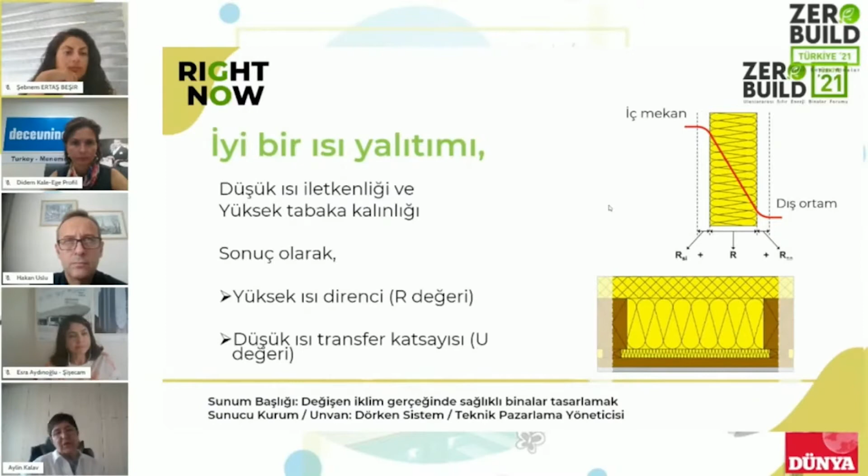We can continue with the presentation. As the most important layer, there needs to be high heat resistance, and also low heat transfer. We have to increase the thicknesses; regulations should be adopted accordingly. What we know from the system is the importance of high heat resistance and low heat transfer coefficient. So we should not look only at the materials - we have to look at the columns, the junctions, and other materials, and the empty air spaces should be taken into account.

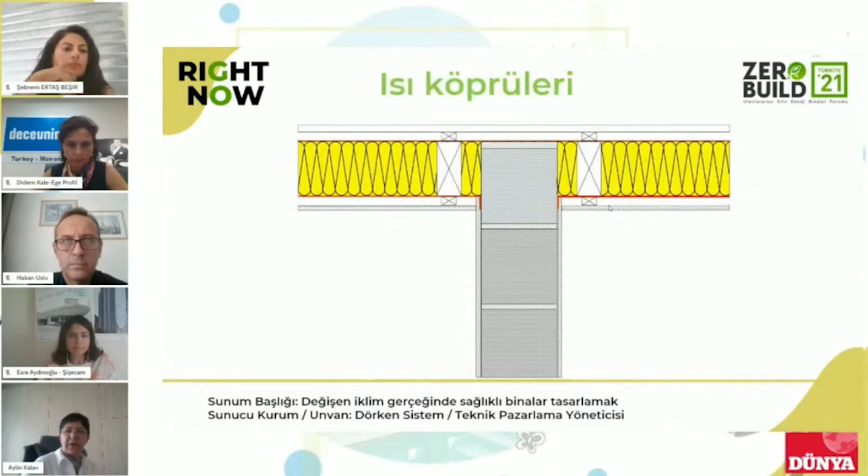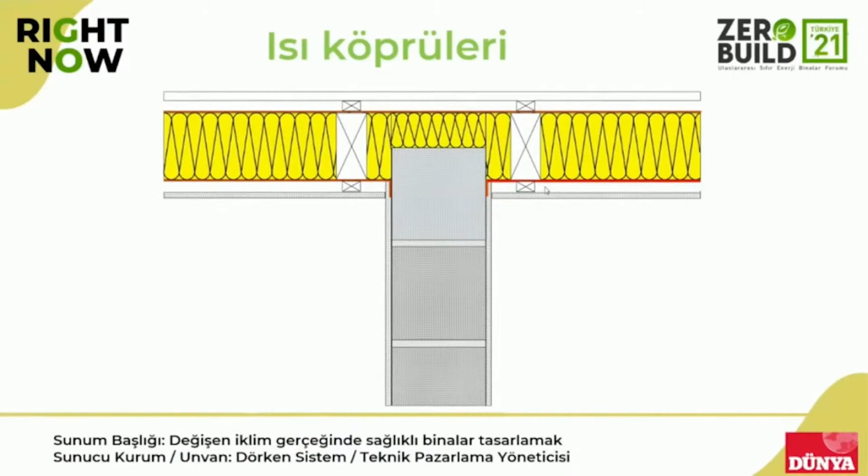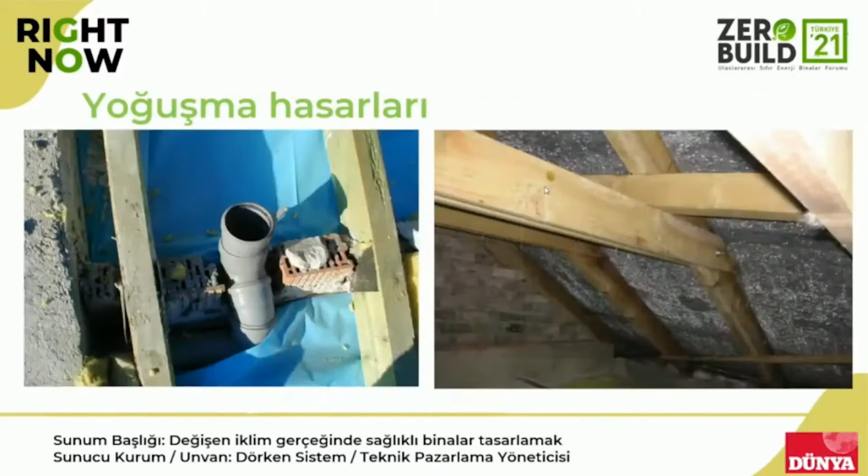I'd like to give you some information about condensation. In a few slides, I'll look at this. Of course, there are some weak points. We see what is there, so we can see. Let's continue.

Therefore, there are three important things: vapor diffusion, air tightness, and wind tightness. At this point, when we take all the necessary measures, we can talk about the good climate there, and of course, it's about a zero energy structure.

Within this system, the most important thing is the diffusion. It is about the carrying of the water evaporation without air movement, and there are differences there. At this stage, it's about the related SD value, and I will tell you what SD value is in the upcoming slides.

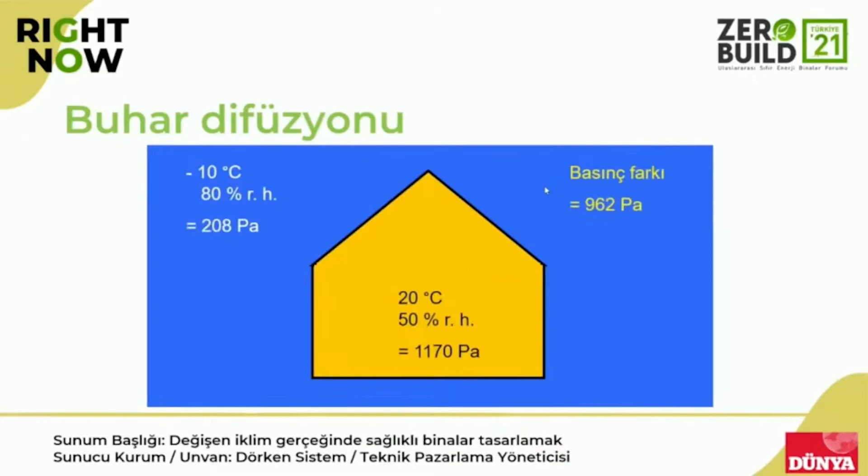So the problem is that, let's continue. The most important problem is about this, and if the relative humidity is 50%, we can say that there is 962 Pascal as a difference.

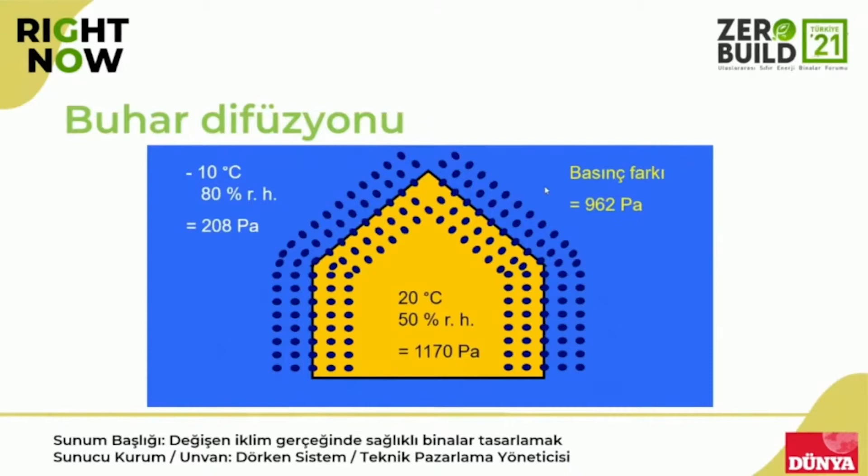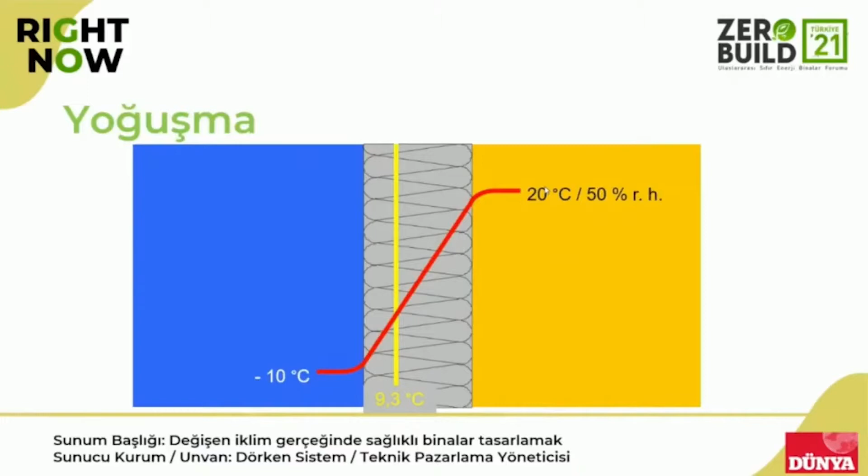Let's continue. During that stage, the heat insulation, as the insulation will be colder, we will see the evaporation will be there and the condensation take place. As you see here, the insulation is with air tightness and tight insulation. So condensation will be within the heat structure.

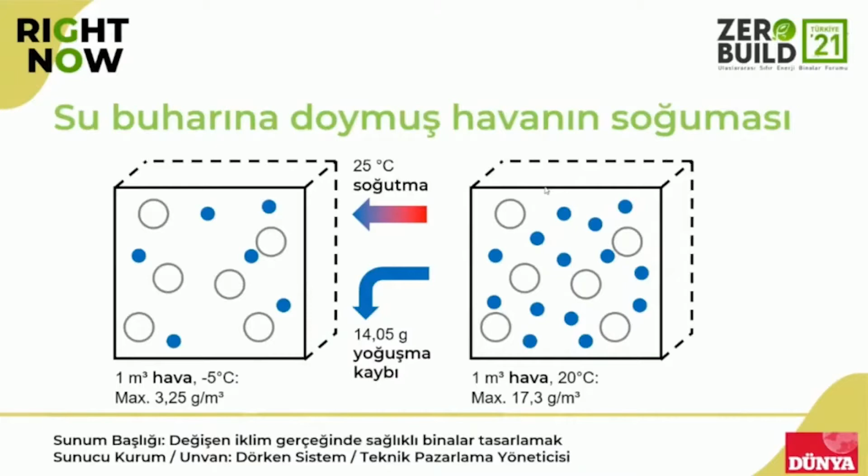In one cubic meter, with a certain 25 degrees centigrade of cooling, it will be more than 14 grams. People generally say that when the roof is leaking, they think the only problem is about this. It's about the systems as well, because the condensation water can harm the structure, and there will be fungi and other formations there.

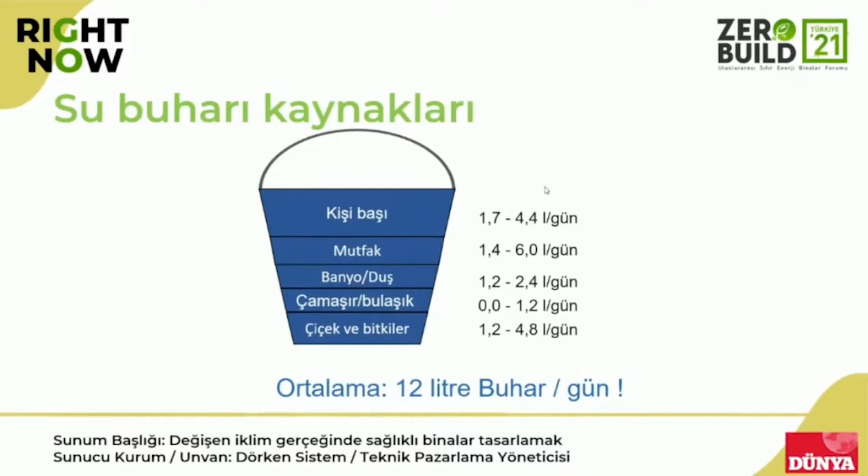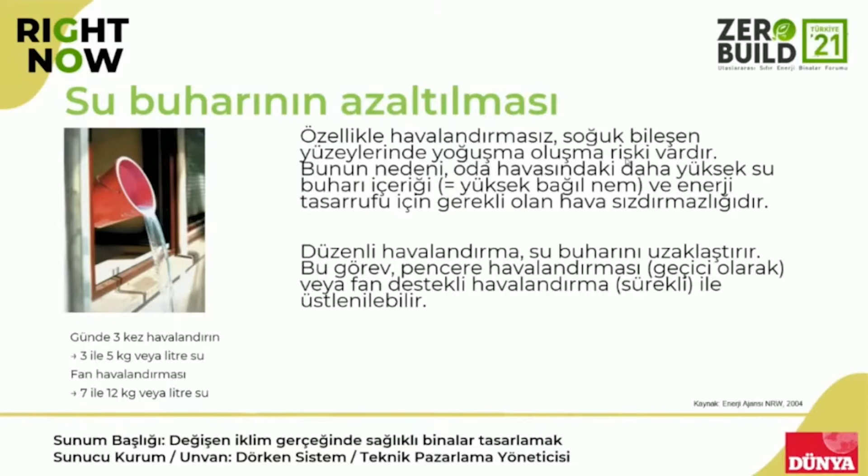In residential areas, there is 12 liters of evaporation formation. When you have this, there is a certain evacuation of the water, and this can go up. So when you look at this, it is very important considering the water evaporation. When you make it airtight, you have to plan the ventilation there.

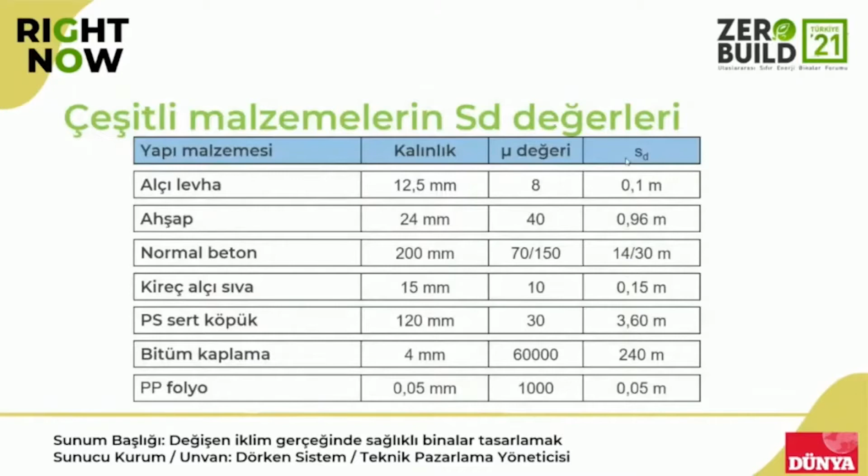The important thing is the SD value of the materials. When we say these, as we can see, it is about the water evaporation diffusion equivalent of air layer thickness.

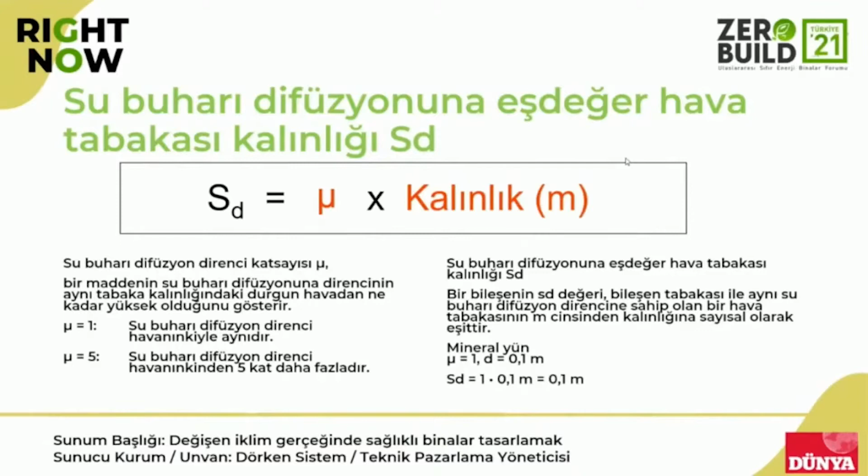So if there's a mineral wool, its μ value is 1. When you get the thickness as 10, and you multiply this in meters, we say 10 centimeters of this. So this is quite important. Let's continue.

This is indeed important because until 2018, the SD value was that up to 0.5 meters is an evaporation layer, and between 0.5 to 1,500 is an evaporation control layer, and if it is above 1,500, it is the evaporation cutting system. In 2018, these were changed, as you can see in the graph. We are talking about 100 and 1,500 meters.

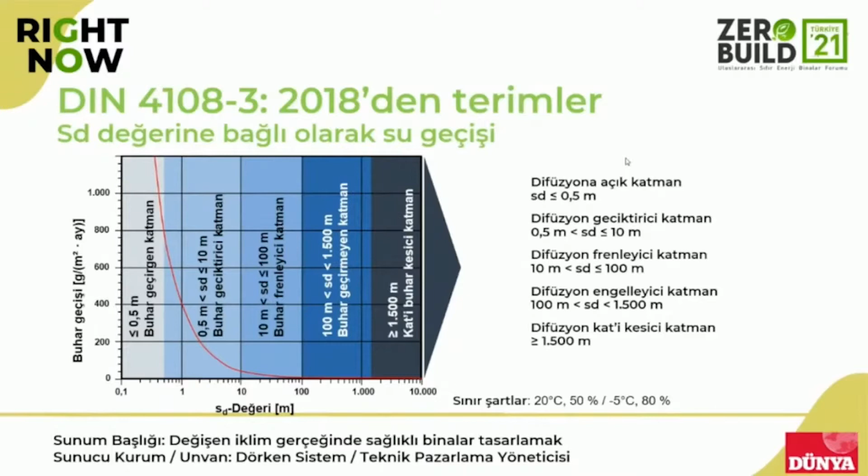Of course, it's on a unit weight in the market, but the most important thing is that the SD values, I mean the diffusion resistances, are the most important thing here.

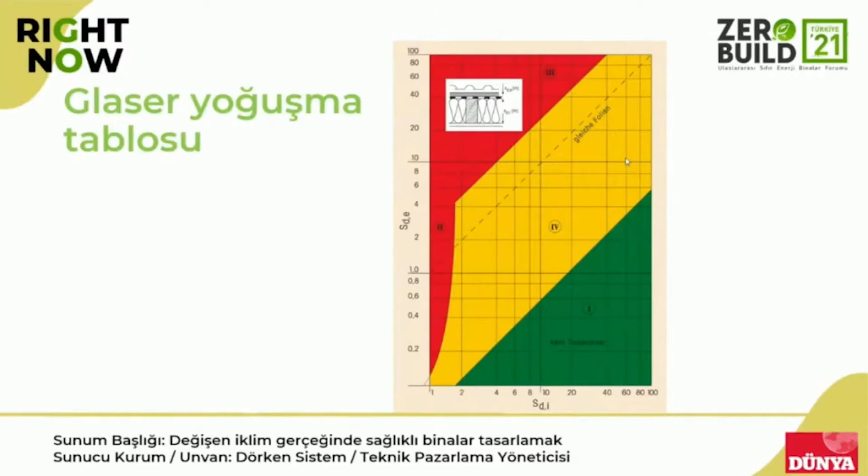Let's continue. This is very detailed. For example, there's a Glaser condensation table. I advise you that. So in the calculation, this condensation is very important. You see where you are, with a good system or not, with good values or not. Let's continue.

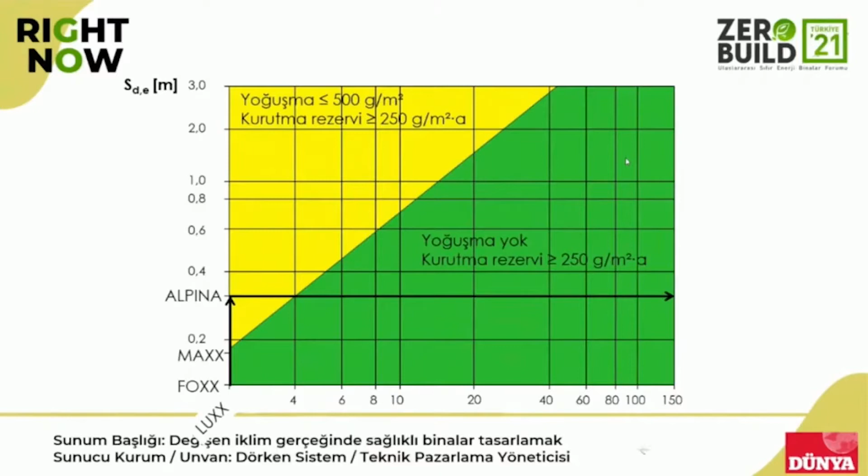Of course, in our products, we are talking about air permeable layers, and as we produce all of these, we have the simulations regarding them. We make all the simulations, and with that, we can make a suggestion.

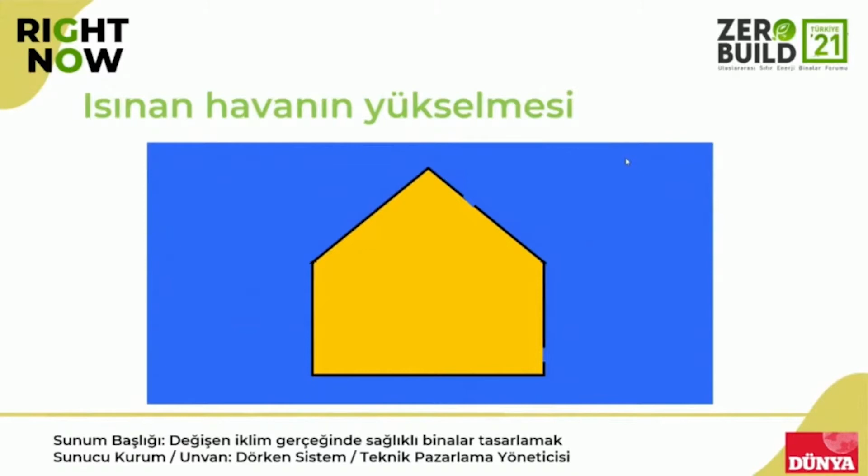Air impermeability is related to material, and also it's about the hot part of the building. There are many losses through air. This is about the suture or joint points of this, and there is the air getting high, and instead of this there will be cold air, and this is important there.

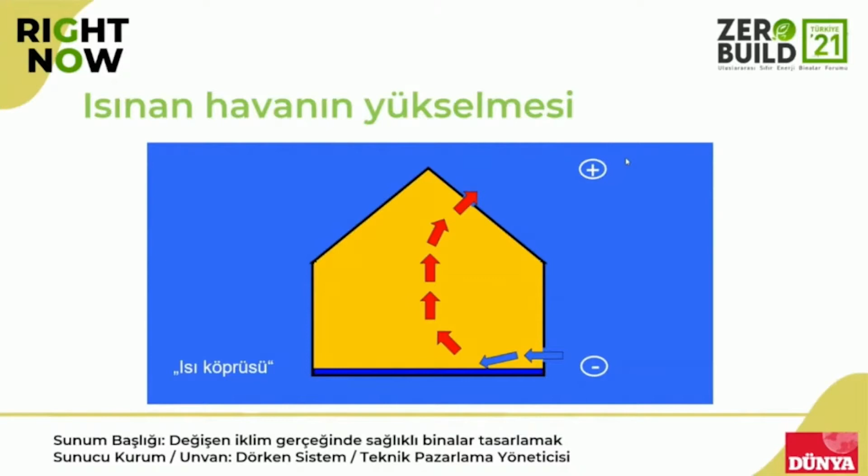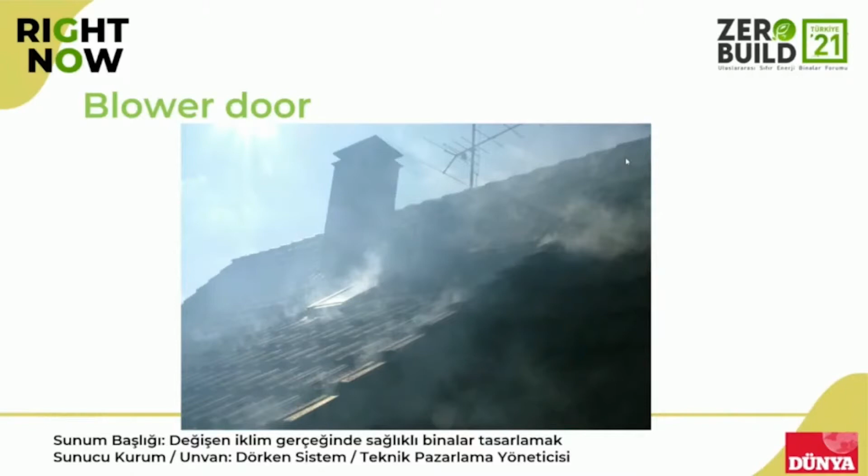In Zero Builds, the previous sessions already discussed this, so I will skip it. But it's about where the building loses energy. You can test them, with vapor barriers, evaporation barriers, and air barriers. It is only one material, but there are different constructions and structures, and based on different needs, there are different SD values.

Let's continue, skip this part. When we say wind impermeability, the layer changes, and what we need is an evaporation-permeable material. For this layer, it's always in the cold part of the building.

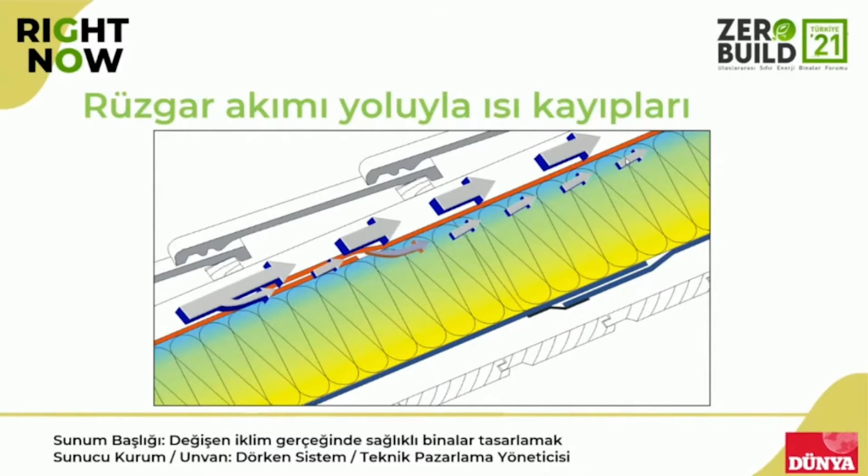You can go a bit faster. We should have been faster, but of course it is about the airtight layer being cold, causing condensation between the internal wall and the outer insulation. The most important thing is that from a very small joint, when there is air there, you lose 90% of the performance.

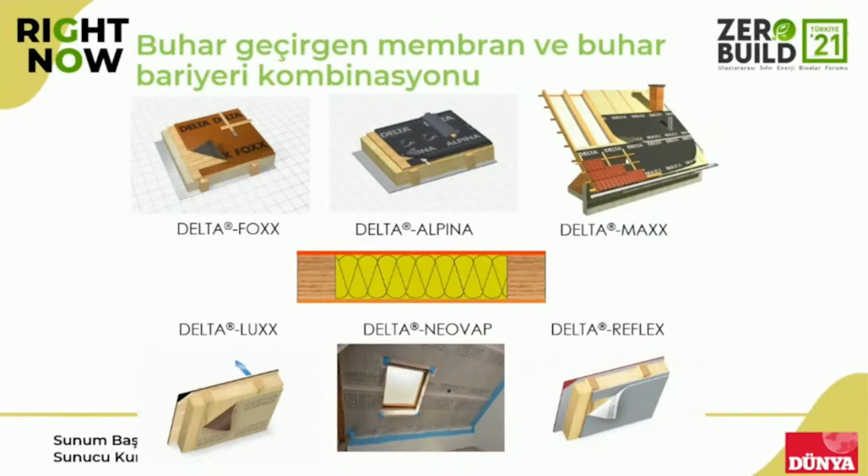There are membranes, the evaporation permeable ones, and the barriers are important, and we provide them.

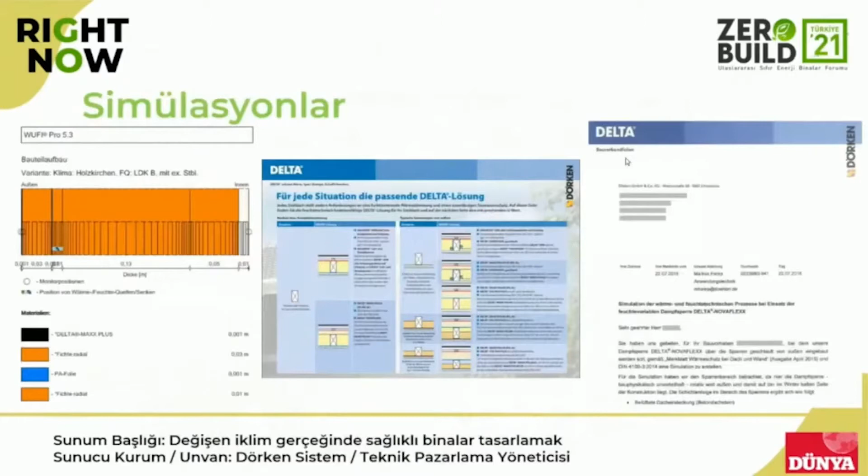I told you we are making simulations, and we provide services and consultancy for our own services. Let's go quicker - as you can see, there are dry wall systems, and mechanical facades and integrated facades can give different information, and we can look at this.

Let's continue. Of course, these are important about the form of the structure, and the implementation is very important here. We can look, we say it's important in terms of distribution.

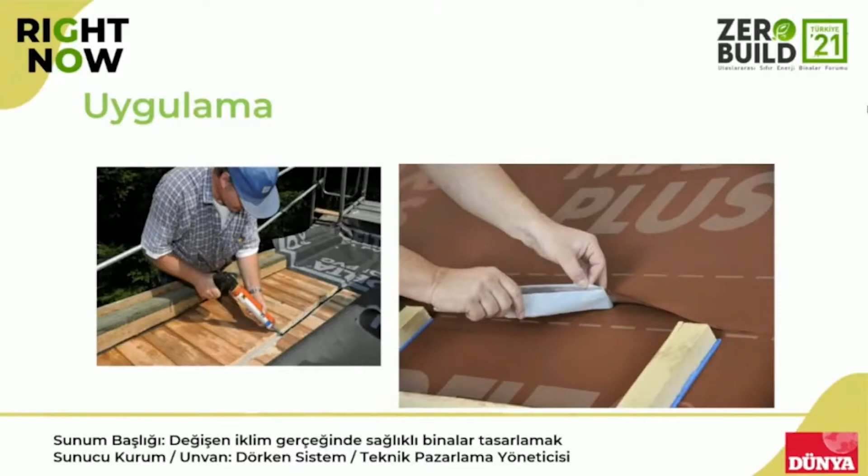Can you please wrap up? This is a very nice presentation, but the implementation matters, and there need to be the right permeability materials. Can we go quickly? What is needed here is this system and the cartridge systems for the layers - it will be appropriate for the material, and you have to select the materials.

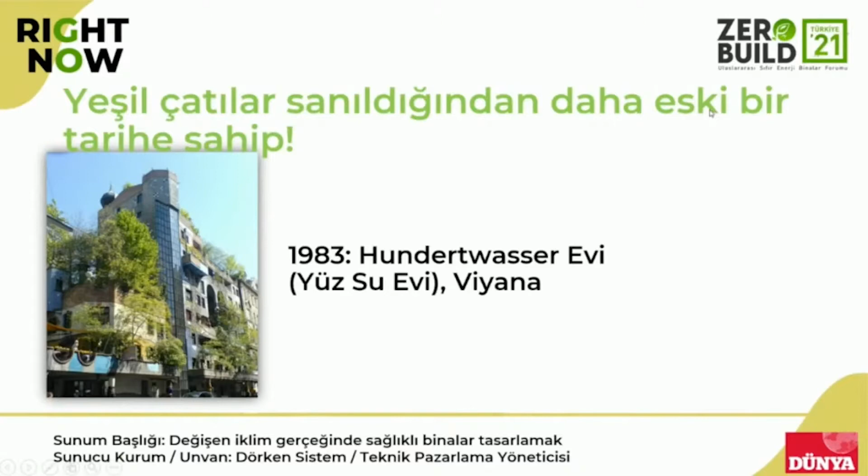I was going to talk about the green roof, and I think it has a longer history than I thought - there are examples from 1983.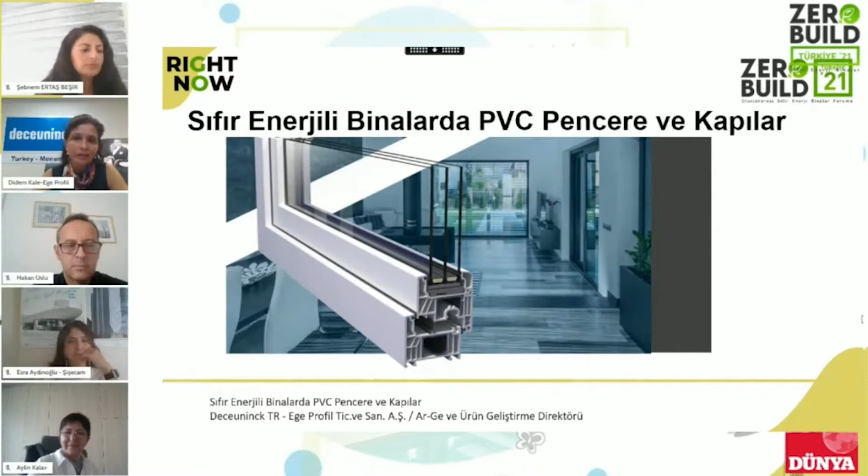I'll talk about PVC doors and windows today in zero energy buildings, the PVC window in the passive building, and the necessities there. First and foremost, with our company, there are some organizations, and of course Deceuninck is second in production of PVC.

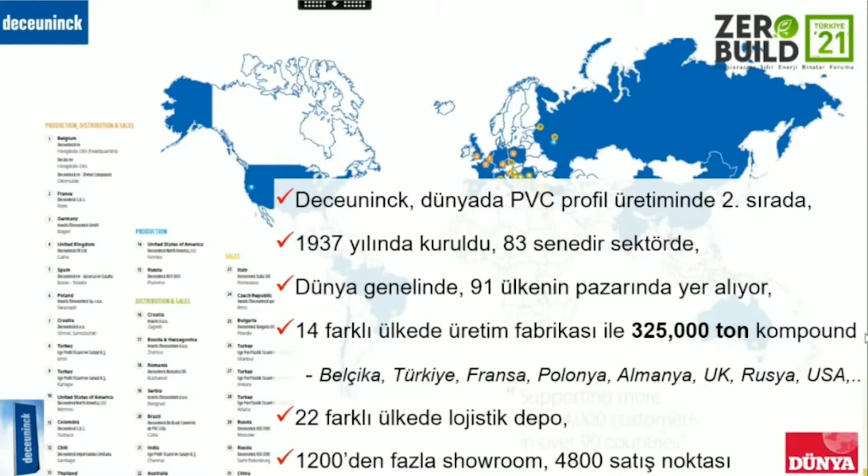It was established in 1937. It's been in the sector for 83 years, and is present in 91 markets of the world. We have production plants in 14 different countries, and this is not only about other countries - we have other companies too: Egepen, Deceuninck, Winsa, Pimapen, Maestro, and in aluminum systems as well. With our R&D system in emerging markets, we have all the product development processes.

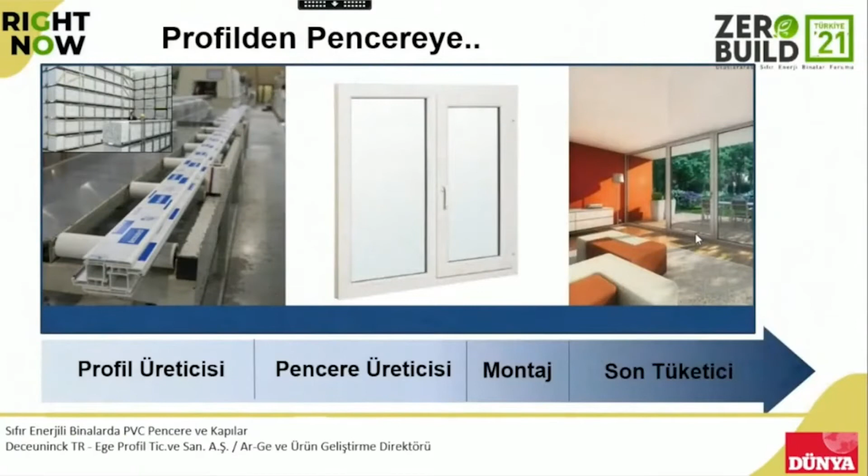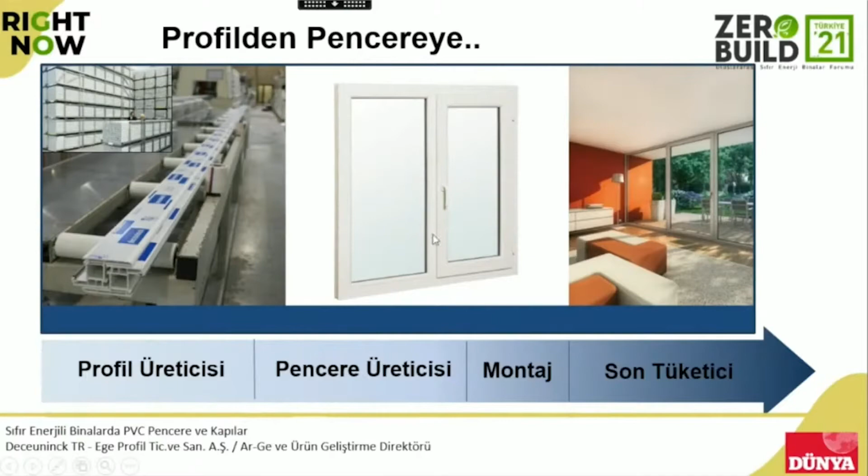We are here with the system, and we do PVC profile manufacturing with the cassettes. It's taken to the manufacturers, and then our product goes to the end consumers. When we look at this in different parameters, we have several things, and this is an important factor.

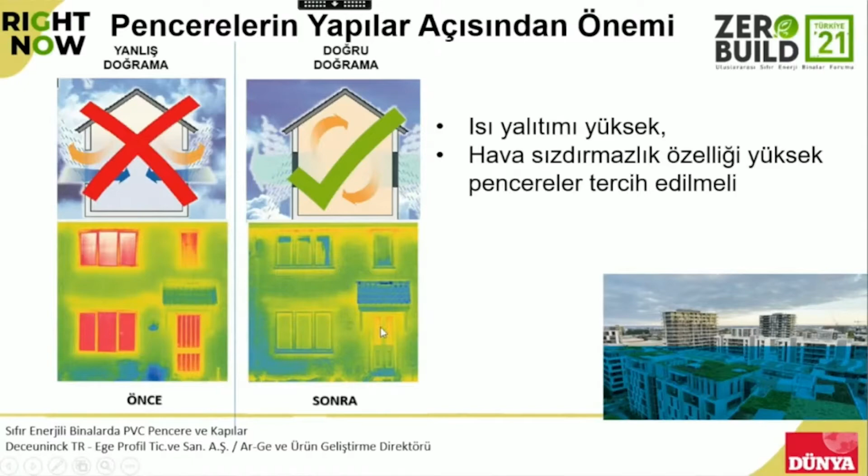It's about heat insulation. As you know, we're talking about the thermal camera, and when we look at this, we can say there are leakages in the windows. However, when the right window is selected, the heat insulation can be made in the right manner possible.

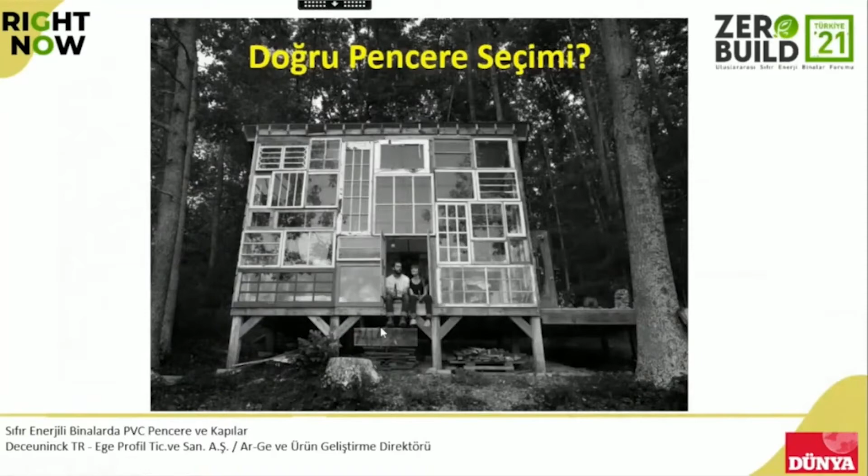If we talk about our expectations from the window, not only heat insulation but also wind load - there are static expectations as well. When you think of this, it should be strengthened with steel.

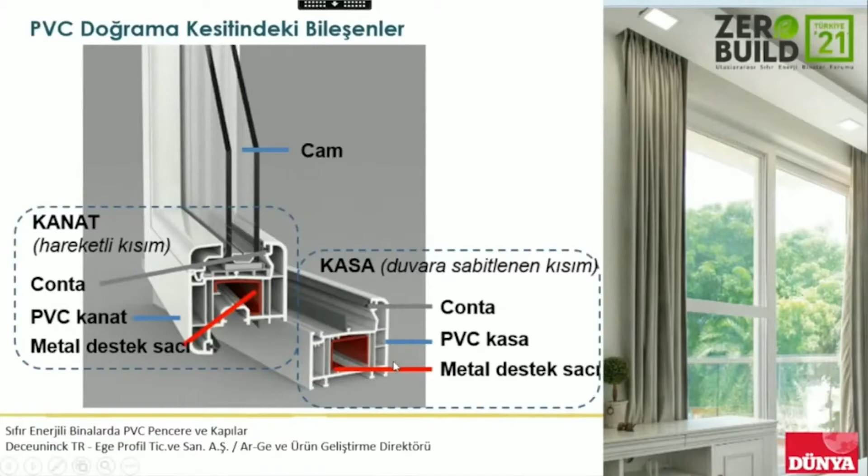We have to talk about the expectations of thermal performance, acoustic performance, static resistance, and also water and air impermeability, recycling, high quality, and harmony with the standards, because you provide services for different countries, so it's important.

And there's the CE mark, and the performance criteria statement is important, the sustainability, and there are other options available.

So regarding air tightness, instead of its past state, we can say that air tightness or air impermeability - this one is class 4, the other least is class 1.

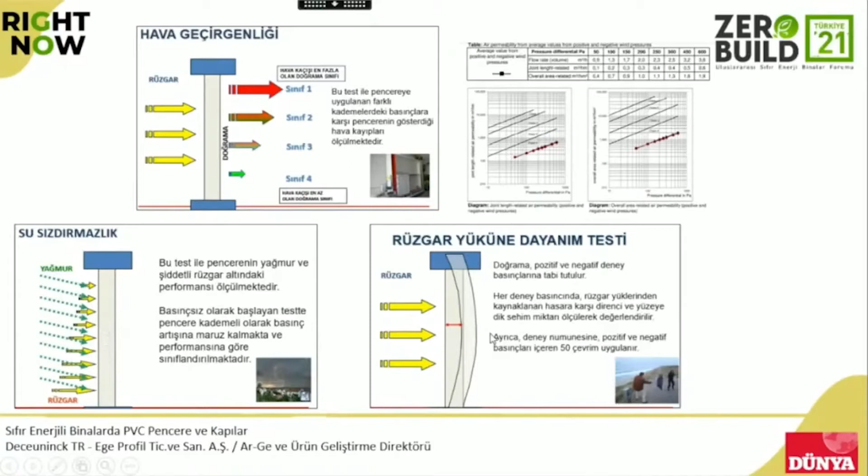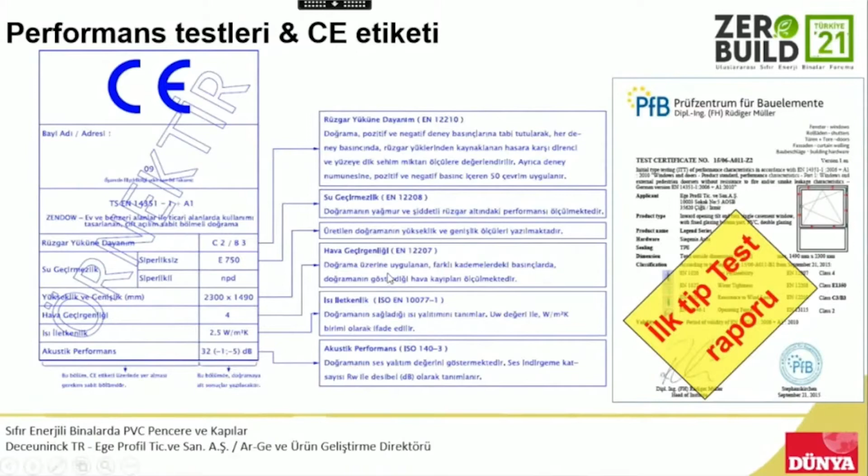As regards heat insulation, when we look at the development since the 50s, we see that there was only one glass. Now it is two glasses, and then there were two frames, and in principle it is the same. Following the two glasses, insulation increased, and the introduction of new materials improved the situation.

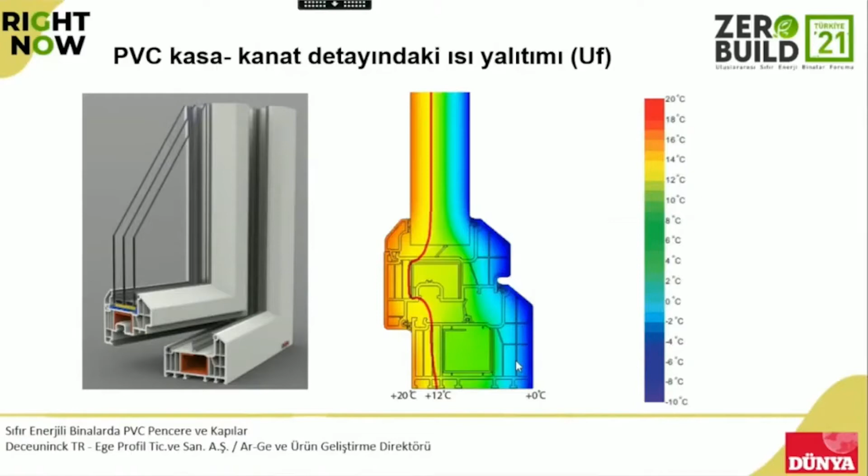Of course, as a result of development in technology, now thermal transmission can be analyzed by software programs, and we can calculate these thermal values while designing the product.

But here I would like to share that when we talk about transmissibility, we have the frame and also the glass, which can transmit heat, because when these two features are combined, then we have the right and appropriate material.

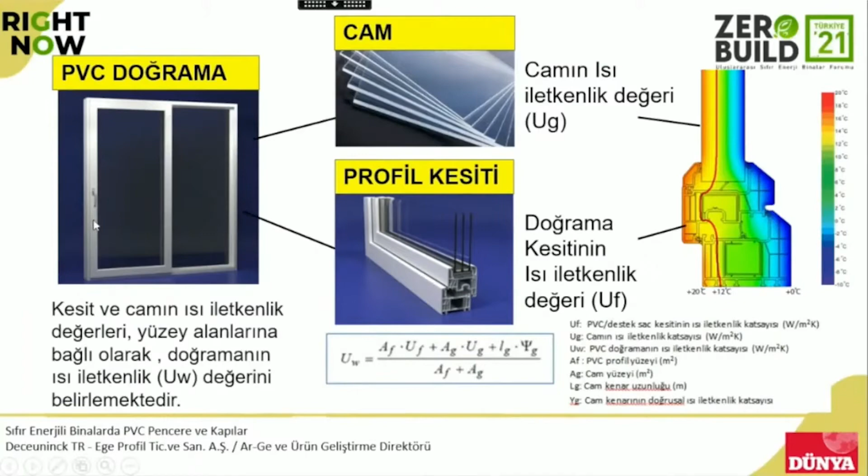When we look at these values, this is the common windows system in Turkey - 60 millimeter, 70 millimeter, and this is the frame thickness. It was 1.5 to 1.3, 1.4. But as for the new generation systems, we have thickness smaller than, thinner than 1 - it is 0.92 or 0.90.

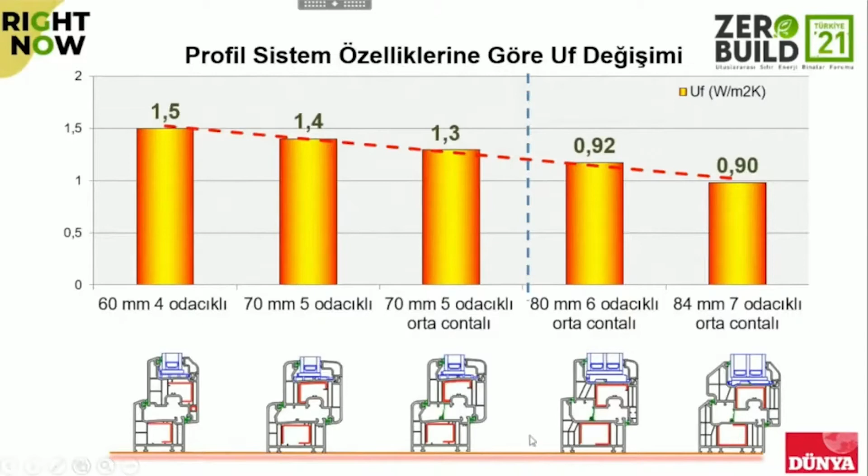We use certain seals and gaskets. Of course, we have some metal layers to support the system. And while we see that there is a change in this UF value, we have seen there are some parts here, and how it has changed in the windows systems.

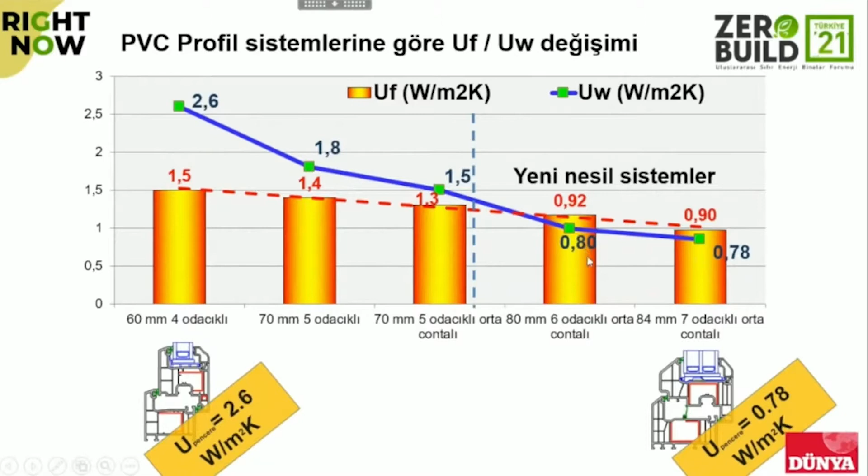Thanks to the introduction of the glass and also these windows systems, the values were 2.6, and these values decreased to less than 1 point, and we have the most common windows system here.

When we look at the new generation PVC Windows, we have this UF value smaller than 1, and U is 0.8. That's what we expect.

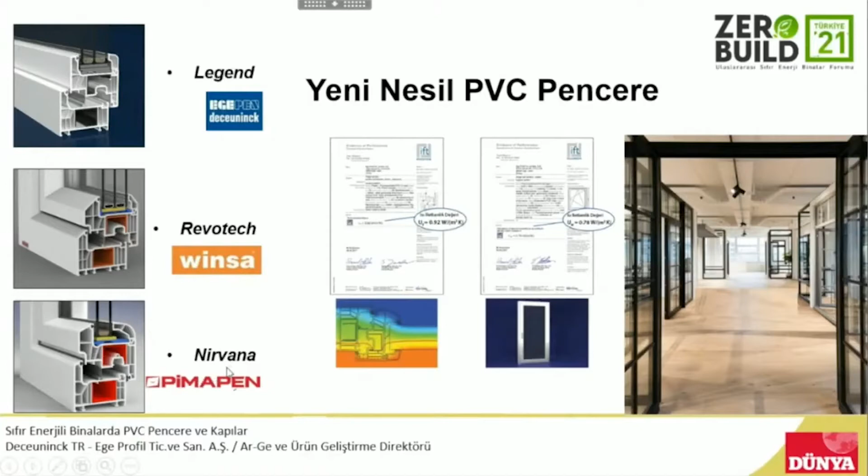I mentioned 3 systems: we have the Legend, and in Wins it is Egepen, and in Winsa it is Revotech, Pimapen, Nirvana, it is 80 millimeter, and they meet these requirements.

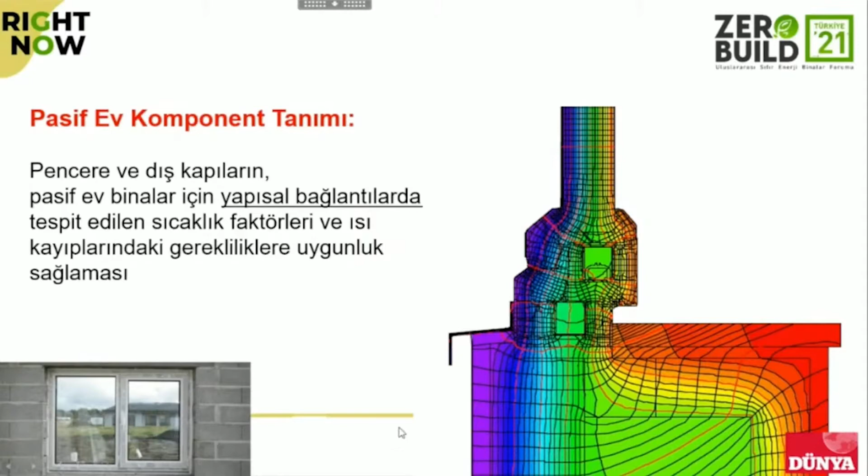But the key point is the passive house component. When we look at the criteria required for passive house window systems, these windows, and also doors and exterior doors, need to meet the requirements.

When we look at the overall situation across the world, you can see the climate zones: Arctic, cold, cool, warm, temperate, warm, hot, very hot. So we have 7 different categories of climate zones.

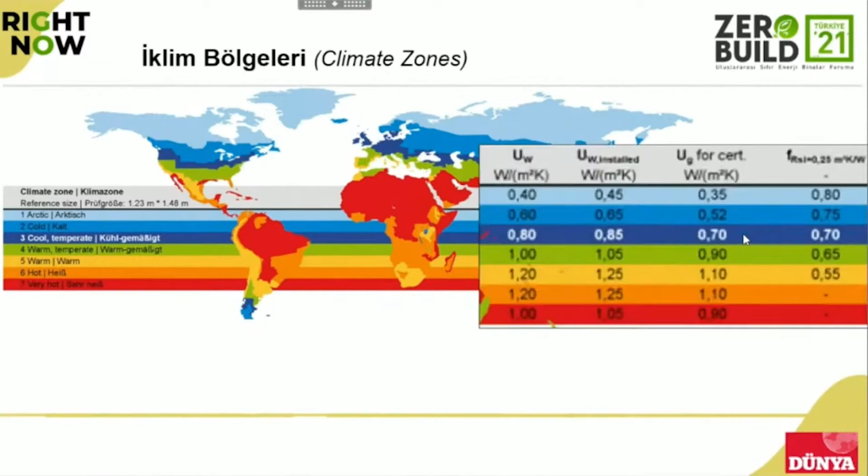What we see is U window and Ug values change according to the climate zones, and you need to meet the requirements of the climate you are working in. Let me skip this part. As the firm, we have premium series and we have set our objectives.

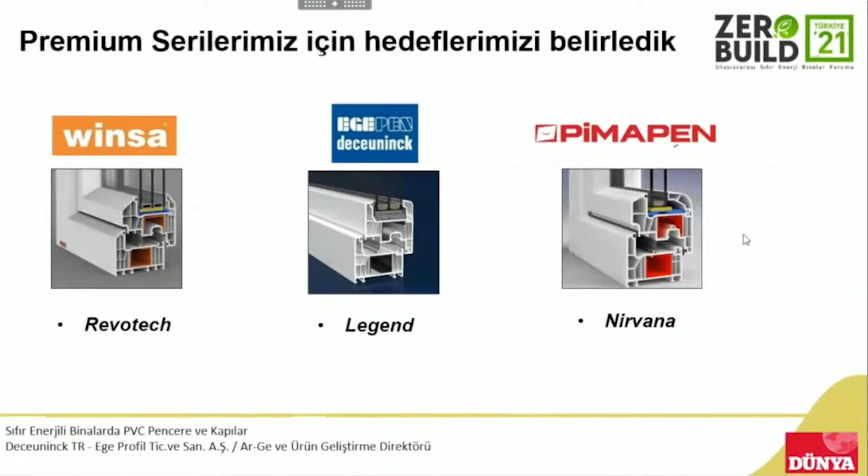The first system is Revotech for Winsa. It is good news for us as well - we have obtained the Passive House Component Certificate. That means the certificate can be used for Passive House applications.

I am not going to share the details of the components. What we can do, if you really wonder about this topic, in the Q&A session you can ask me some questions and I will elaborate on this part.

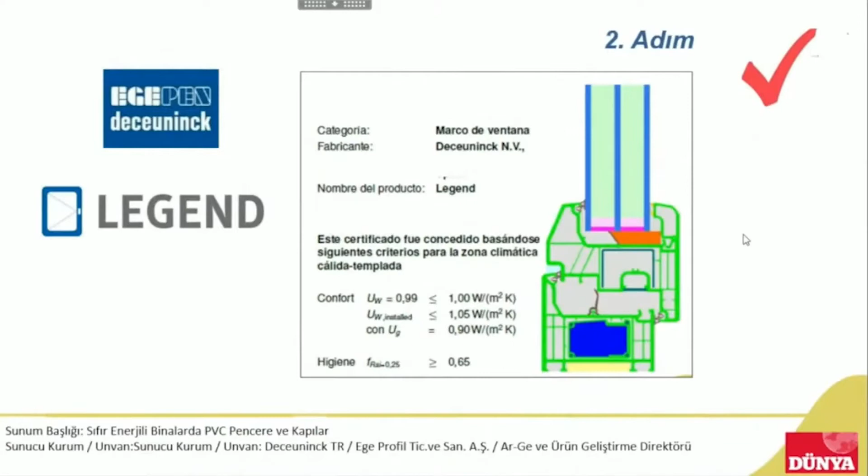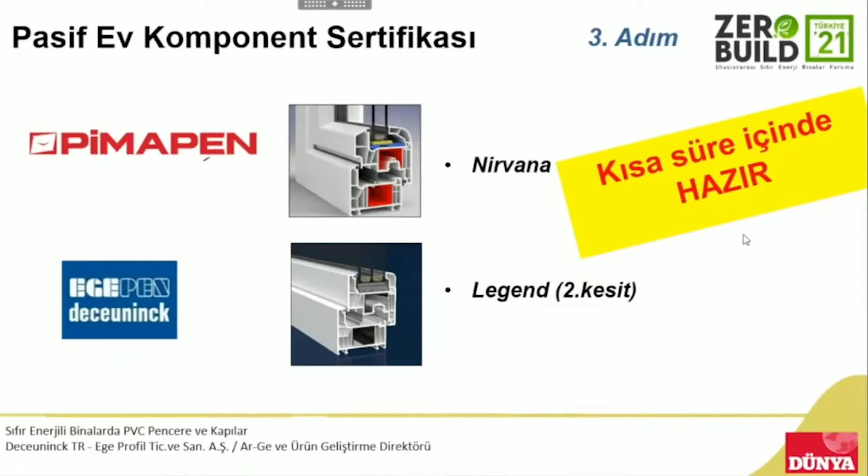Let me skip some parts. This Revotech, we have certified, and as for the Legend for Egepen Deceuninck, we have certified this. As for the third step, which we will work very hard on, Nirvana for Pimapen and also Legend for Egepen - the second phase will be ready very soon.

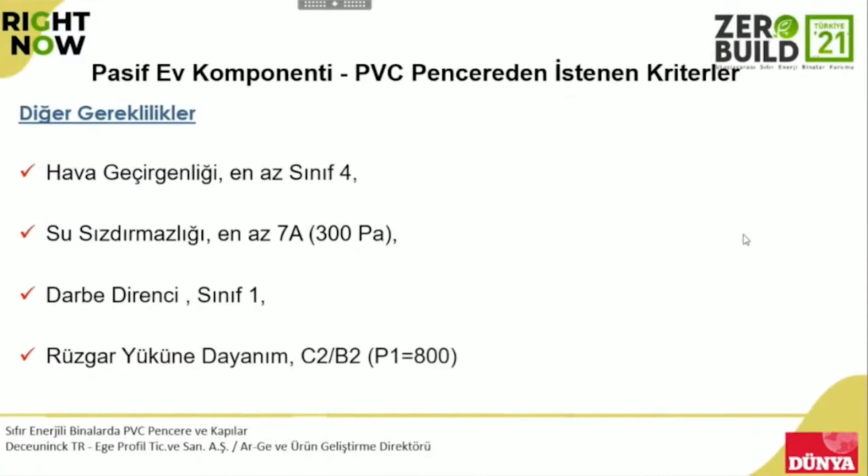And cool condition - as I discussed before, there are different expectations and we are working on it, and we will make it ready very soon. These cool climate conditions are important for our certification and we are working very hard to make it ready. There are also some standards and requirements for air tightness in our system, and we are working on this issue.

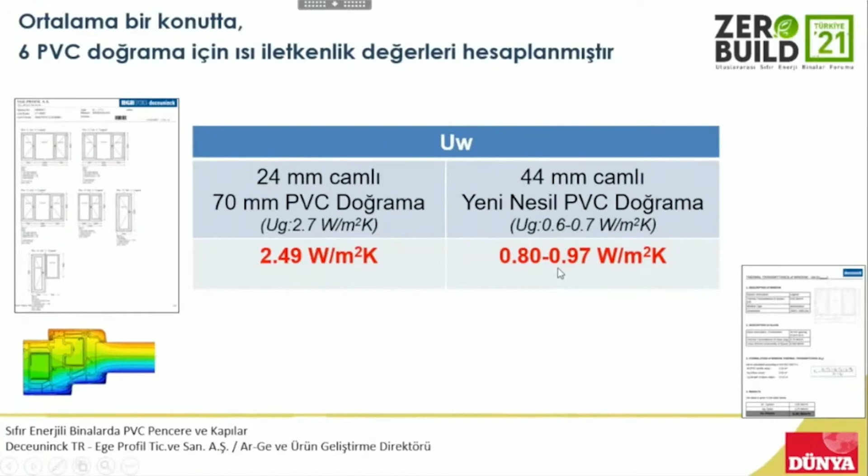In summary, yes, we have obtained the certification, but the question might be about the cost. What I can say is, if we have a 24mm glass, 70mm PVC system...

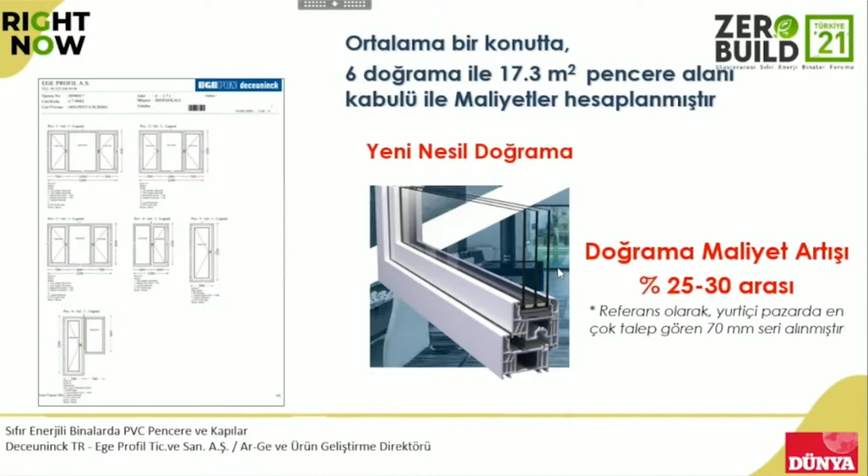If we look at the values, and assume it is 17.3 square meter, the cost difference is not so high - it is only 25 to 30%. So you can compare it with the existing systems.

We publish the energy calculations regarding all the models that we manufacture, and you can select all these new Windows systems and compare them in years. So you can select the parts and calculate the issue.

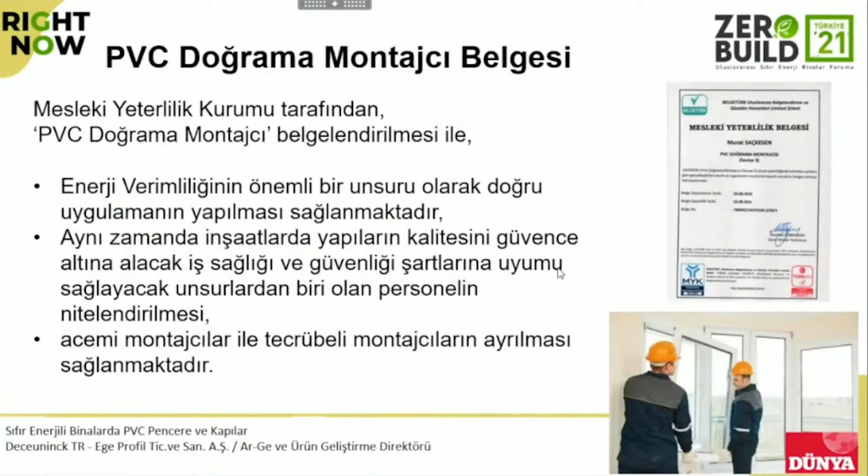My final point is, of course, we talked about the need to have a document that approves that this staff is skillful and this staff is qualified.

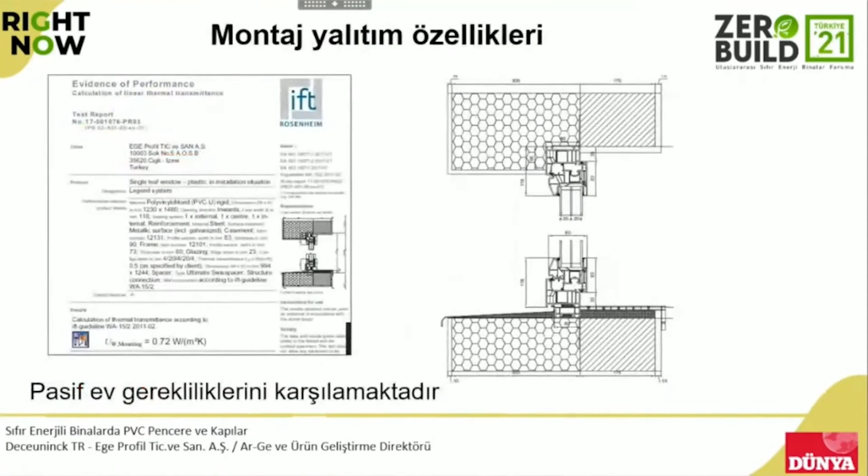In fact, it's a very useful and extremely helpful presentation. It is great to know that you have obtained the certificate. As I said, I will ask a question about this issue in the Q&A session.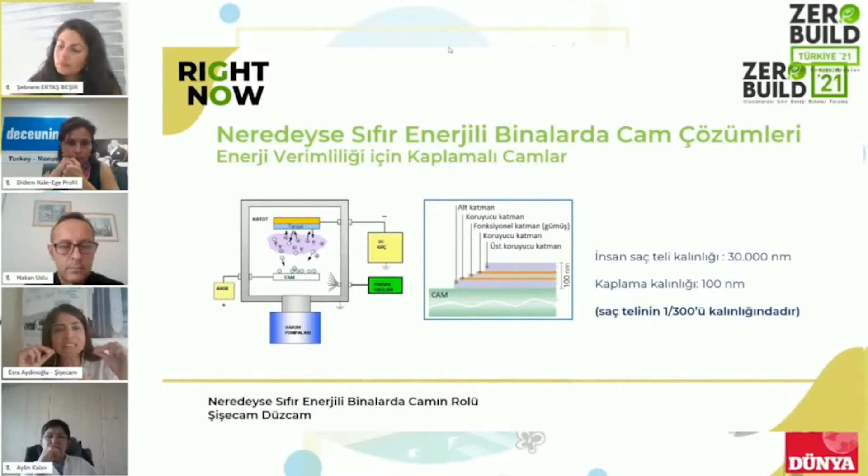So how do we manufacture this low E and solar low E glass? We manufacture it in a closed circuit, and we have this metal oxide coating. The thickness is 100 nanometers.

It is thinner than your hair. We have been making contributions to nature for 46 years by manufacturing this thermal glass, and we have manufactured glasses covering more than 200 million square meters. We have manufactured 56 million square meters of low-E and solar low-E insulation glass in 25 years, and we have saved 30 million trees.

Green building design is becoming more and more important every day, and it is important to get maximum benefit of the glass. In this respect, we have natural light, and we can control thermal values, which is important for safety, security, and also noise control.

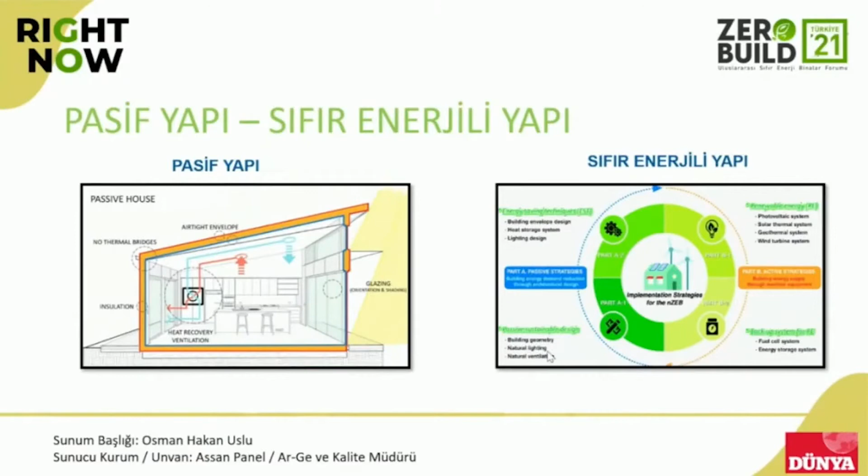As a result, whether it's a passive house structure or a zero energy building, the materials should meet the needs. Thermal comfort and internal air quality can be ensured with the heating of fresh air, and these passive houses date back 30 years.

I wanted to provide a historical background about these houses. The first passive house was built in 1991 in Darmstadt, Germany, where the concept of passive house was born. The first example in our country is the Gaziantep ecological building, completed in 2012, almost 10 years ago.

Main principles in passive house design include high thermal insulation, use of thermally insulated windows, waste heat recovery systems, prevention of thermal bridges, and air tightness integrated into the structures. The Passive House Institute provides certification to these houses.

When we look at the criteria, the thermal energy requirement of a building should be 15 kilowatt-hours per square meter, and the cooling again should be 15 kilowatt-hours per square meter on an annual basis. Total primary energy consumption should be a maximum of 120 kilowatt-hours per square meter, and air tightness should be a maximum of 0.6 air exchanges at 50 pascals pressure.

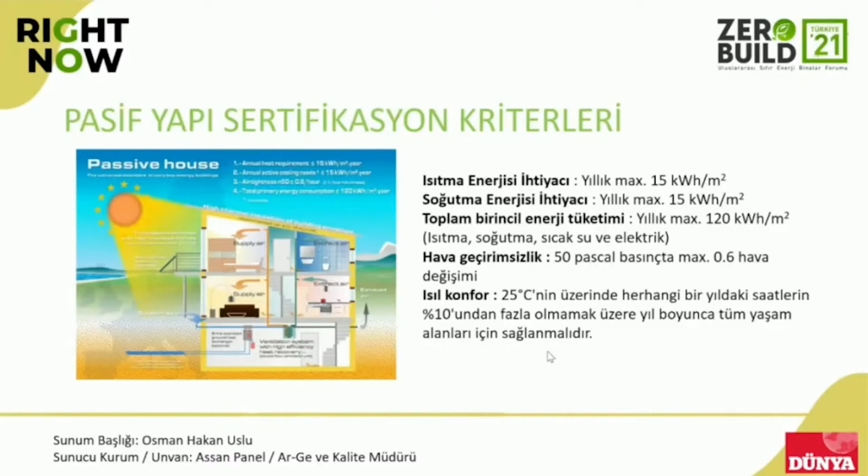Mr. Hakan, we can move on to the industrial structures as we are running out of time, as that would be the punchline. Okay.

We see passive structures in the industrial field too. Passive house should not just make you think of houses, although that's the general understanding. We have passive house structures in industrial practices, but they are limited to 2 out of 1,000 worldwide. The biggest one was constructed in Europe back in 2008 - this is a factory building producing solar panels.

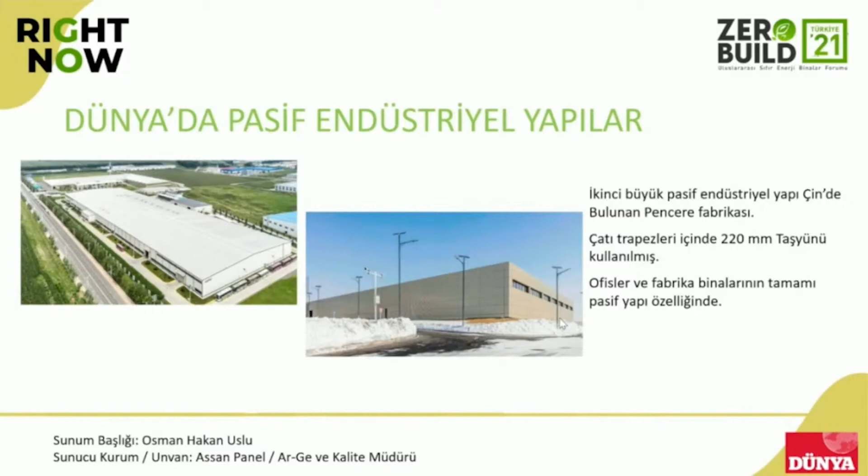The second example is related to a huge factory manufacturing glass windows. Here, 220 millimeter stone wool was used in the external structure, including the roof trapezies. This is the first passive house of South Asia using a sandwich panel with a thickness of 120 millimeters, and just below the insulation panel there's an envelope layer providing airtightness.

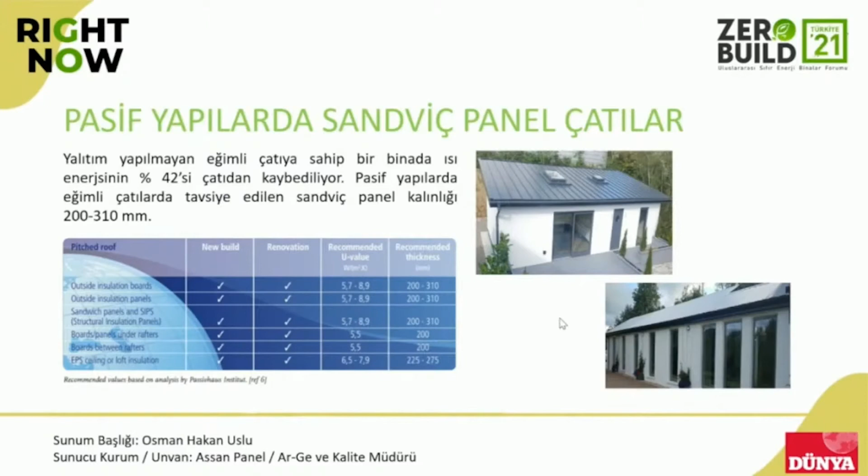I would like to refer to the positions of panels in industrial buildings. If you think about a building lacking insulation, 42% of the losses result from the roof element, and here we need to use 20 to 30 centimeters of sandwich panels on roofs.

Use of sandwich panels has a huge impact on meeting passive structure principles through airtightness. When we compare sandwich panels with traditional wooden facades, they provide 15 times more airtightness, as metal has a superior property. The longer the sandwich panel is, the lower the number of connection units, which minimizes the areas with air leakage.

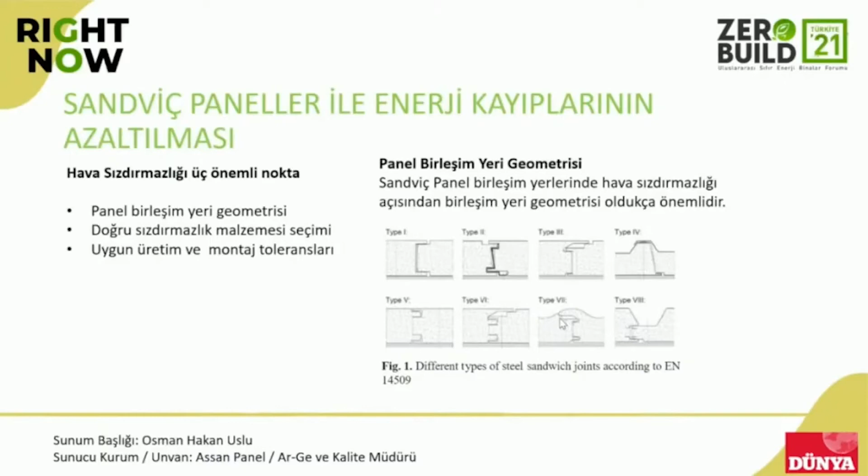To decrease energy losses in sandwich panels, we need to pay attention to three points for airtightness. First, the geometry of panel connection points, as they may be connected with each other through different geometries, and these geometries should comply with EN 14509, which addresses different types of steel sandwich joints. In design, we should try to minimize leakages here, which has a positive impact.

Second, we should make the right choice of tightness components. For example, open cell polyurethane foams, when compressed 60 to 80%, provide airtightness; otherwise we see leakages. Closed cell polyethylene foams do not need any compression and are able to provide airtightness on their own. Therefore, designers should choose the right component and design the panel accordingly.

Polyurethane foam materials are quite rigid composite structures, but there are also stone wool sandwich panels used on roofs, and as a fiber characteristic, they are quite flexible.

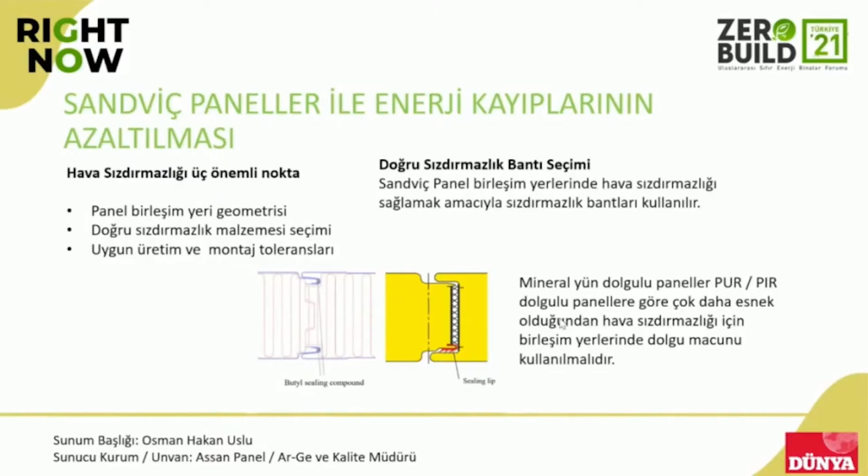Can you wrap up your presentation, Mr. Hakan? Okay, due to that flexibility, we need to use a specific paste between the connection points.

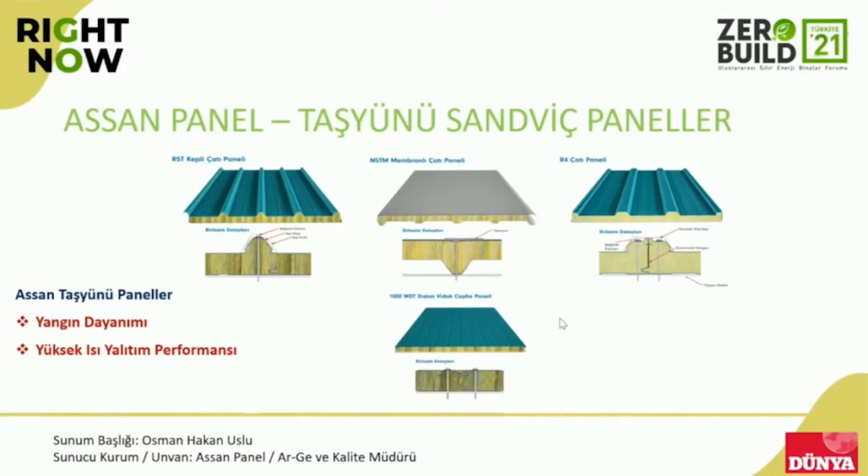As Assan Panel, we provide a rich portfolio of products. With stone wool sandwiches, we are able to ensure flame retardability for 3 hours, with superior flexibility. With polyurethane sandwiches, we can ensure lower heat conductivity at thinner thicknesses.

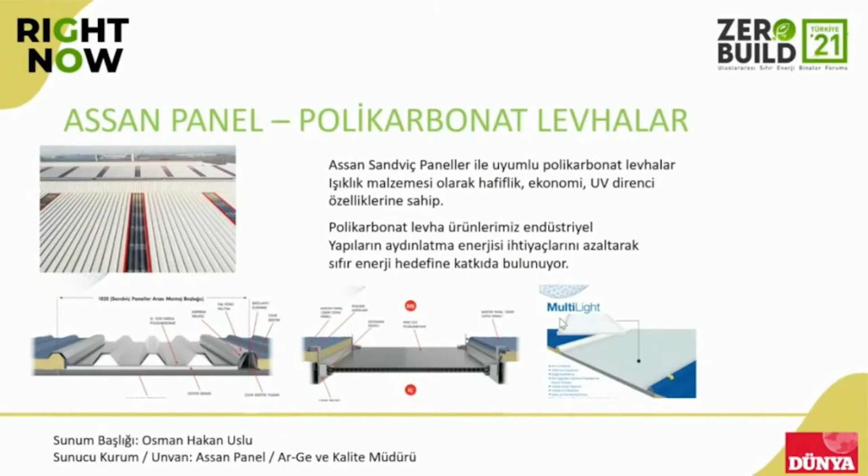In addition to our sandwich panels, we have polycarbonate plates for decreasing the light energy requirement of buildings, as it is also a significant consumption area. Recently we had a sandwich panel compatible with residential roof panels. In every roof panel, it is difficult to have a renewable energy panel with photovoltaic characteristics, so we developed a special design product that complies with the characteristics of photovoltaic panels, ensuring a quality connection despite wind loads. We need to bring them to the markets.

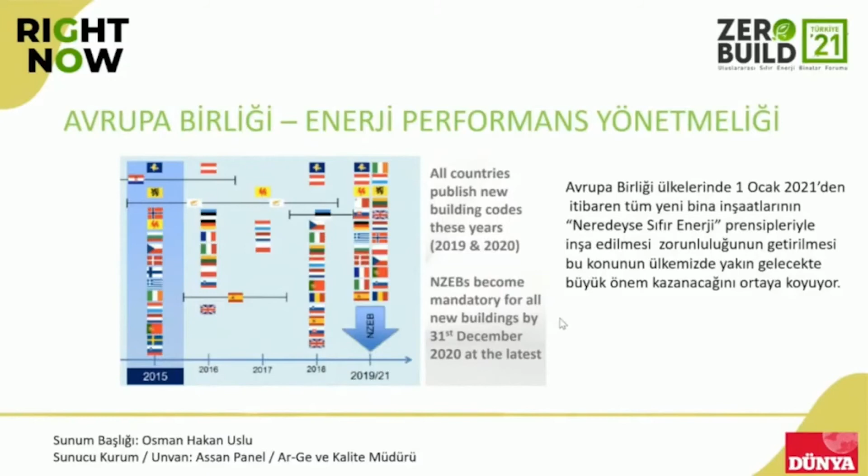With the regulations, we see zero energy buildings becoming a must, and near zero energy buildings become mandatory for all implementations until December 31st. Turkey will soon probably be enacting near zero building regulation very soon. Thank you for giving me the opportunity once again.

Thank you very much, Mr. Hakan. This was a lovely presentation. Of course, after such valuable presentations, we probably have questions, but before taking the questions, I would like to ask a few, starting with Ms. Didem.

I'm very curious about this topic because you obtained a very important certificate, a component certificate. This certificate means that you meet the standards for passive houses, and maybe it will be more affordable to ensure certificates for passive houses. What do you think we can do for these certificates in Turkey?

Also, quality certificate is important for profiles, window profiles, and you stated that in your presentation. What does Deceuninck do, and when do you plan to share those certificates with us? Actually, the component certificate part of your presentation can be shared with us. I know I have asked so many questions at the same time.

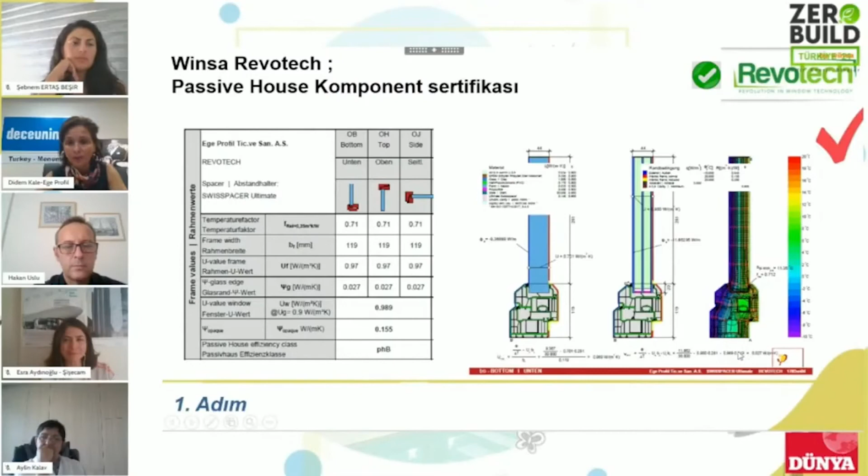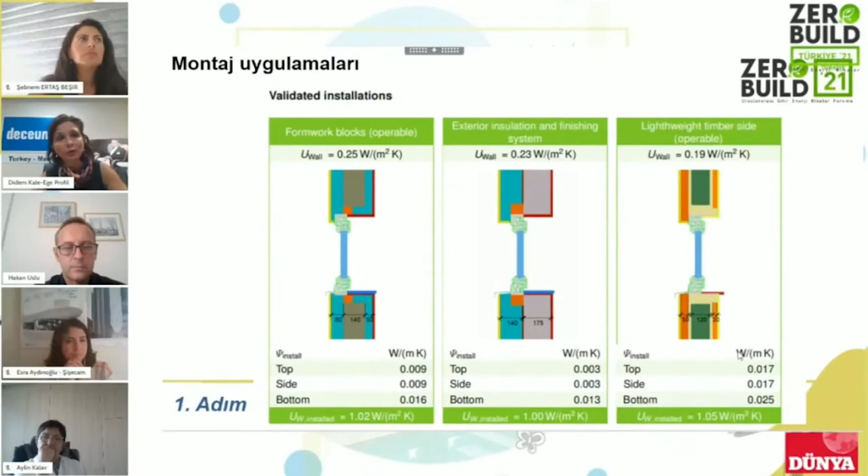As I stated in energy calculations, I skipped this part. Here you see that the UF value is below 1.000, and there are other important advantages concerning the assembly. Structural connections are a criterion for us, but this certificate is also an important factor, and we provide these trainings to our dealerships. Together with Passive House, we're going to see differentiated installation practices, and we think of delivering Passive House related trainings to our dealerships after a while.

I don't know whether this will answer all of your questions.

Yes, actually, I'm sure there will be more questions concerning this. It is a very nice success, and we are very happy to see you're sharing it. I think before the questions arrive, I can ask Ms.

Esra this question. In near zero energy buildings, we talk about triple glasses rather than coated double glasses. What do you think about their usage areas? What can you say about the usage areas?

Well, thank you very much for your question, Ms. Şebnem. I also actually did not emphasize this part. When we reach this level, we reach a thermal level like a wall. I mean, rather than sitting behind a wall, you sit before a window and you're able to enjoy the view. So in architecture, our specialists can use these glasses without limiting themselves.